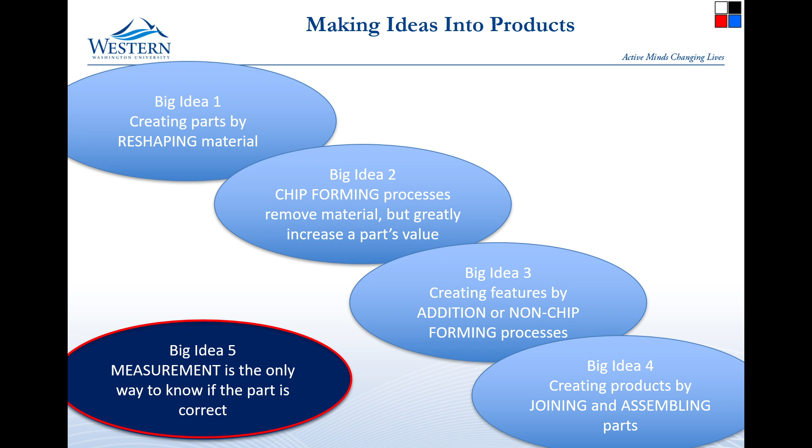Remember, metrology is one of the five big ideas. Metrology, or measurement, is the one that ties everything together, because we have to be measuring things at all points in the process. So it's really important to do metrology, to understand metrology. And we will do some metrology now. We'll understand it more as we move along through the quarter. So, from the videos, why does metrology matter?

It's what lets us communicate about science and other things that are quantity dependent. Okay, so it helps us to be able to communicate well for quantity dependent items. The study of metrology allows us to have organizations that standardize our measurements, so we're using the same measurements. Okay, that seems pretty helpful and pretty important. So that globally we all understand what we're talking about in terms of anything that's quantifiable. Okay, that's good.

And on a much more personal basis, you want to get what you pay for. So if you go to the store and you buy a gallon of milk, you would like it to be a gallon. You would like to not get 0.7 gallons because somebody else had a different idea of what that was. So on any of those things, whenever we're buying or selling, we need to have metrology to be able to measure what we are exchanging.

So you talked a little bit about this. How does metrology work so that people all over the place can understand that they're getting the same measurements? For anybody, what's the method?

There are different organizations that institute specifically what things are. There's the one in French that has different weights and measures. One, International Bureau of Weights and Measurements. Yes, the BIPM. And every country has one. They have this conference when all of those countries' institutes get together. It is the International Conference of National Standards Institutes Committees. And so to have international and national in the same title seems very confusing, but anyway.

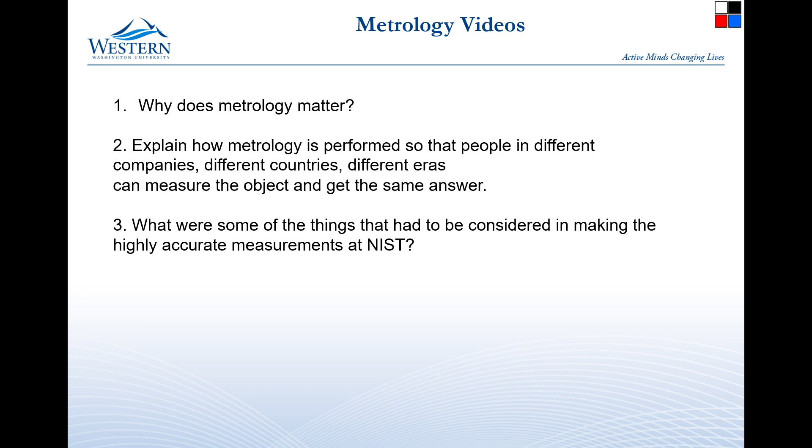And he got bought out again. I don't think he's resold the same company a third time, but he at least did it twice, which seems, I mean, that's good work if you can get it. Anyway, interesting.

Metrology means metron, to measure, and logia, to speak or to study. Interestingly, the Greeks had this idea that you should study and understand something before you talk about it, which seems like something we could all learn. So that seems good. We're mostly going to be talking about dimensional metrology, which is the metrology of length. We'll look at some others just because they're fun. All of the metrology is pretty cool.

A while ago, Ted came to me and said, hey, I need one of these to position some things on my satellite. And I said to Ted, great. He said, can you make one of them? And I said, well, I don't have a way to measure it. I think I can make it to the tolerances you're telling me, but I can't measure it. So I'll make you the one that's the best that I can.

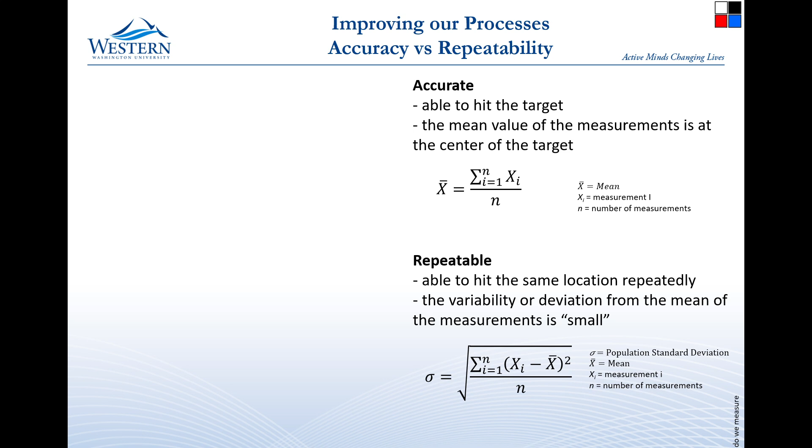And I want to crunch that deviation down. I want to have the smallest deviation that I can. So if I were shooting arrows at a target, if I were accurate and repeatable, all of the arrows would be right at the center, very closely matched together, because repeatable and accurate means the average of them is right at the middle.

If they are very close together but not quite at the center, they are repeatable, but they're not accurate. I can have them going all over the target, completely spread over the target, and as long as the mean of those is at the center, I'm okay for accuracy, if accuracy is my goal. And then this last case is something that is quasi-repeatable, but not long-term repeatable, and inaccurate.

So maybe if I run 10 parts in the morning, they're all the same, but if I run 10 parts in the afternoon, they're closely grouped, but at a totally different place.

Okay, so if I have a machine, and it's not accurate and repeatable right here, right now, what do you think I would prefer? Would I prefer an accurate machine that's not repeatable, or a repeatable machine that's not accurate? You don't want the flyers, you want to be able to move the entire group in one direction. That's right. So I want a repeatable machine that's not accurate, because I can change the parameters to change the accuracy.

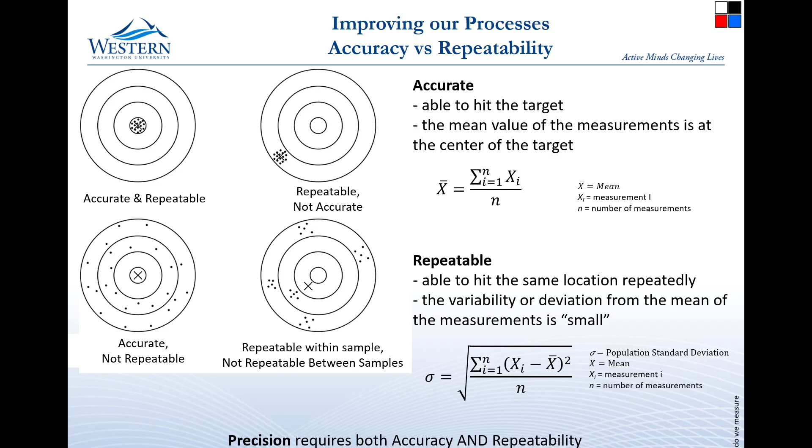Okay, precision you will hear used a lot. Precision is when something is both accurate and repeatable. You will hear people use precision in place of accuracy a lot. They do not mean the same thing, but you'll hear a lot of people talk about the precision of the process, and they only mean the accuracy of the process. It's like just the way it is.

So I want to know this: with somebody next to you at your table, or maybe two people if you're at a 3-person table, how many length or distance measurement tools can you think of? Calipers, ways to measure—make a list.

Can we write them down? Sure, write them down. Scale. Balance—write it down. Length or distance? Oh, balance is not. That's not.

The phone measure, yeah, like a scanner. I don't know if they make a better one. Hopefully they do, my phone sucks. I like that. Visual. Just write the list of things. They'll get what we need. Construction and stuff that they had to—it's like a string that's a sentence. They do it every year. That's just, it's like a 10-yard string. Like a string. Well, sonar.

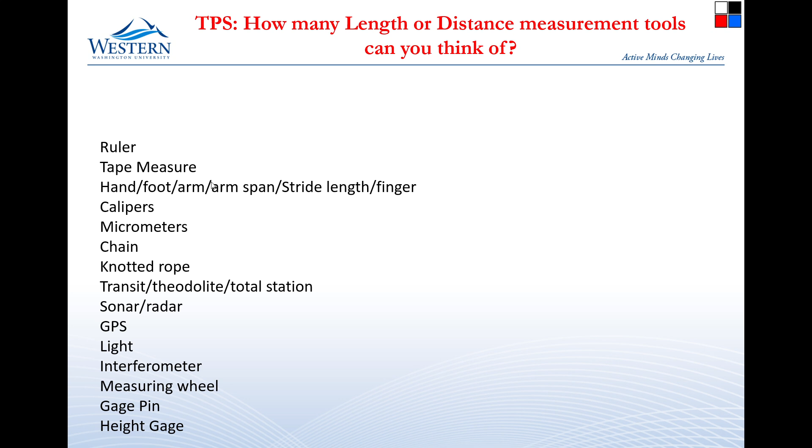All right, that is the wrong stream. That's why that is not going forward. It's now going to go forward.

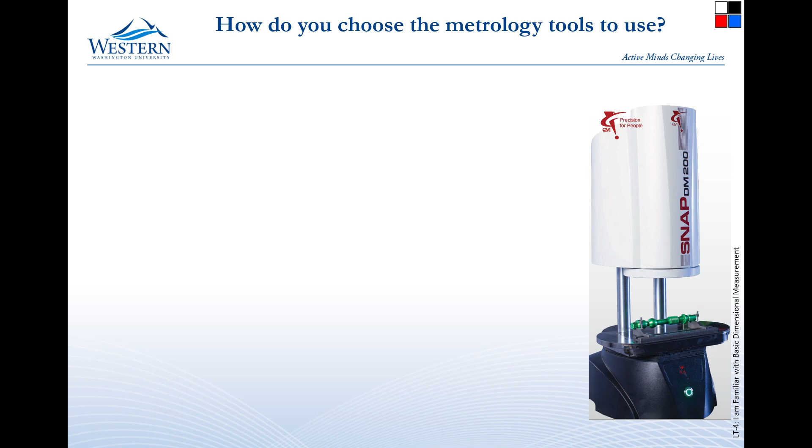All right, how do we choose the other metrology tools that we want to use? So we talked about accuracy and repeatability, but there are a bunch of other things we need to understand about a metrology tool to decide if it's right for a situation. The first thing is that the best case, the case you should strive for, is that the gauge capability is 10 times better than the accuracy you need to measure. We rarely achieve this, but that should be our goal - your measurement device is 10 times better than what you need to measure.

So if you need to measure thousandths of an inch, it's best if your gauge can measure tenths or 10,000ths of an inch. Now, what is the minimum? The minimum would be about half - it absolutely has to measure half of your required accuracy. Otherwise, you really don't know where you are.

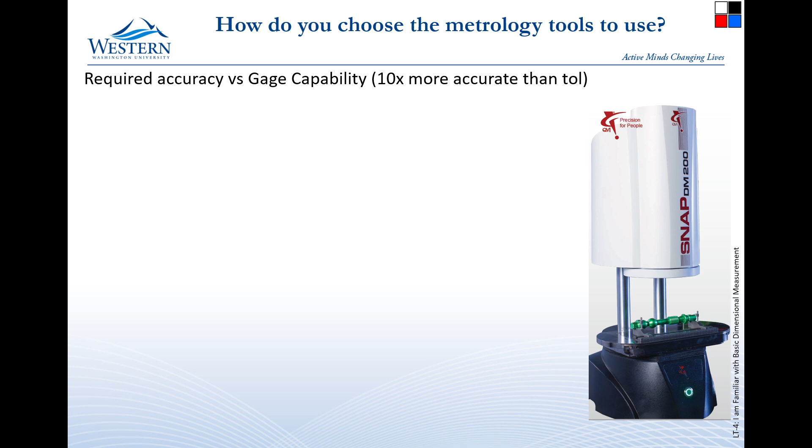Second thing is the range. You have to understand the range of your device. Does it measure 6 inches? Does it measure 6 feet?

At NIST, we saw the coordinate measuring machine, and it can measure about 3 feet by about 4 feet. NIST also has something called the M cubed, and it's in a sphere about this big, and its entire measurement range is less than the diameter of a hair. Its accuracy is phenomenal, but its entire measurement range is about the diameter of a hair. It's a huge machine, cost millions and millions of dollars to make.

We need to understand the resolution. So on your calipers the other day, I said you need to get calipers that say 0.001 because we need a thousandths of resolution. That's the distance between marks. Now, we can argue a little bit about whether that's the smallest we can actually measure off that device.

We need to understand the robustness of the device. How good is it in adverse conditions? So these gauge pins are often used on the shop floor. You can take a set of these to the shop floor, and if you just made a hole in something, you keep trying gauge pins till you find out what the size is. They make gauge pins that are 10 times more accurate than this. When you have those gauge pins, they don't leave the metrology lab, and these, you go out to the shop floor and just use them.

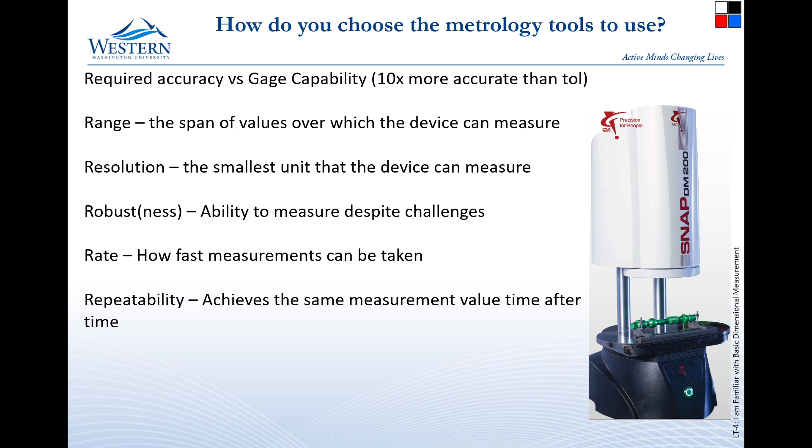What they figured out was partway through the day, somebody was getting too warm and opening the garage door a little bit on one end of the building. It wasn't anywhere close to the machine, but that temperature difference would throw off the machine. They also had special programs so you can warm up the spindle of the machine, and they found they had to warm it up within a certain amount of time of running these parts.

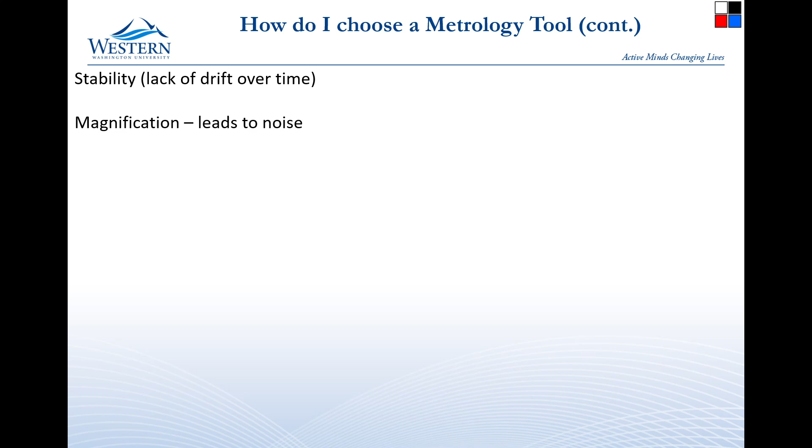Now, we might find out that if we did that, the gear was not high enough quality to support that amount of magnification. The more magnification we have, the more noisy it gets. So we would see the end of that needle oscillating back and forth, especially when we have electronics. The more magnification you have, the more noise you have in the signal, and the harder it is to tell the real signal from the fake signal.

Surface cleanliness. How good is our system at measuring with surface cleanliness? On your calipers, there's a section that's flat, and there's a section that's sharp.

The flat section is a lot easier to measure things with sometimes because it will sort of level out, and you can feel when it is measuring flat against the surface, which makes it measure perpendicular to the surface.

But if I'm measuring something that might have goo, chips, and little particles on it, and I measure on those flats, all I'm doing is guaranteeing that I'm measuring on top of little goo and particles. But out here on the sharp part, if I measure with that, I'm more likely to either displace those particles or to not hit them at all.

So on calipers, there's a section that has better ability to adapt to cleanliness issues. Or I could just clean the part—that would be a better approach overall.

We have to choose contact versus non-contact. Calipers are contact; I'm contacting the surface. There are lots of laser measurement methods and other electronic measurement methods that are non-contact.

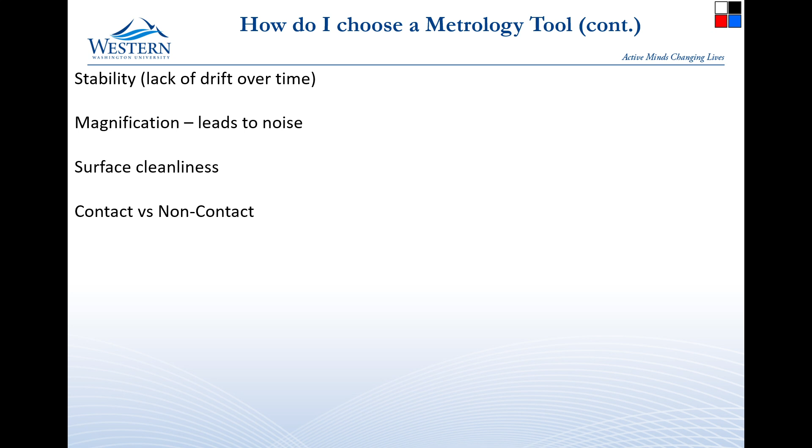There is a lot of certainty in contacting the part. When you don't contact the part, it can introduce all sorts of things into the system that are very hard to find. Like some of the ways that you measure surfaces, just an oil sheen on the surface will throw it off, and you actually don't get the right answer because of a very thin oil sheen.

Have to look at the budget. So calipers are really cheap. That's why we make them, why we make you buy them.

Coordinate measuring machines are not cheap. That's why we did not make you buy your own coordinate measuring machine to haul around the building. That would be really cool—if everybody had one, you'd be the coolest kids on campus. I don't think anyone else would think that. If you were hauling around a little wagon with a CMM in it, no one's going to think I'm cool. Well, it's just that you don't have your own metrology. The people in this building would think I'm pretty cool. There could be some accusations of needing a life, but metrology is more important than being cool. And metrology is cool by its very nature, so that's good enough.

All right, ease of use. When you folks use the coordinate measuring machines later this year, you will find that the ones we have are bonkers hard to use. They are so bad, oh my goodness. And oddly enough, almost all coordinate measuring machines have the same terrible software, or there are about four different versions, but they're all terrible.

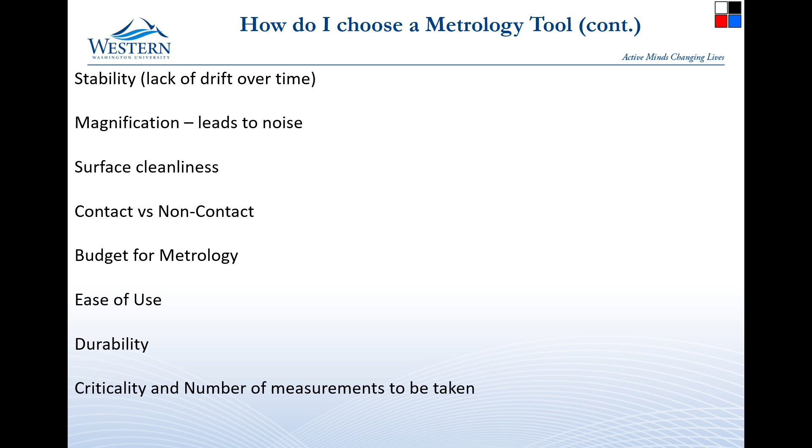And number of measurements to be taken—that kind of goes with the rate at which we can take it. So what I'd like you to do is think about calipers, a tape measure, and just using a folded piece of paper. Somebody said highlighters—you can measure something in highlighters, hands, feet, or any of those things.

So you can take a sheet of paper, maybe 8.5 by 11, and fold it in half. Your 8.5 becomes 4 1/4, fold it in half again and it's 2 1/8, fold it again and it's 1 1/16, fold it again and it's a half plus a 32nd, and you keep going. And a ruler—we'll call it a wooden ruler for this, just for the sake of discussion.

So what I want you to do is rank these for range—which has the best range, the biggest range, and which has the worst range. Best gets a 1, then 2, 3, 4. Then do the same for resolution.